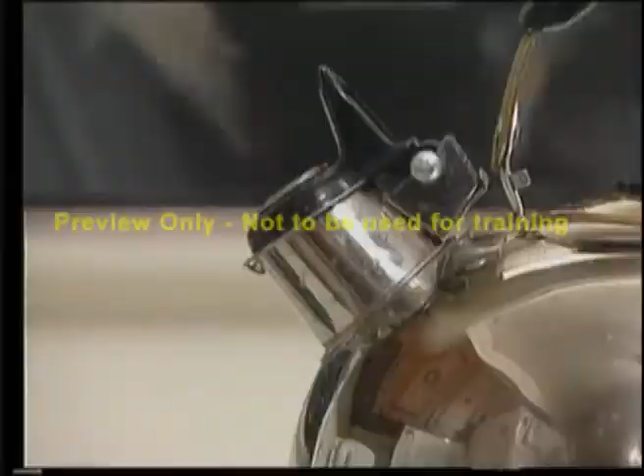We all have a lot of responsibility and people who depend on us. In order to be safe and to return home at the end of the day, important safety rules must be followed.

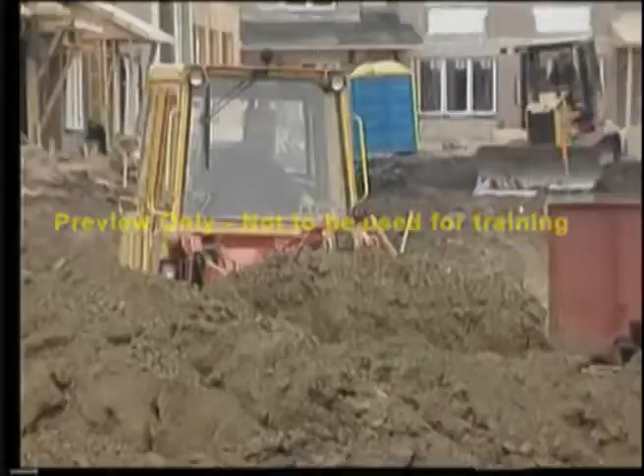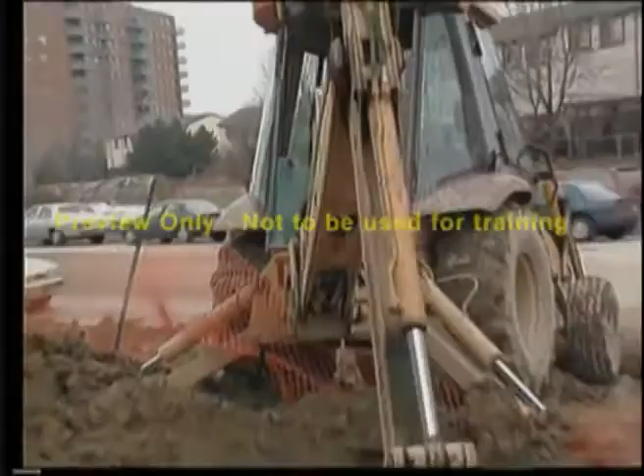Lift truck operators are just like millions of other professionals who earn their living by operating equipment or vehicles. It takes skill, training, and experience, realizing that no job on the ground or in the air can be done at the expense of safety.

Remember, you're working on a piece of machinery that weighs about 9,000 pounds. With a load, it increases up to 14,000 pounds. That's equivalent to 6 cars. Lift truck operators have a difficult job. They lift heavy loads and they maneuver in tight spaces.

Safety isn't something anyone sets out to ignore, but tight schedules, heavy equipment, pedestrian traffic, and congested workspace can compromise safety any hour, any minute, any time. Unfortunately, accidents can happen, but accidents happen more and cost more than we realize.

Between lost time, increased insurance premiums, and litigation, it's common for accidents to cost a company over $1 million. Some companies cannot survive the aftermath and close their doors permanently. Then there is personal injury. Let's not forget the family, especially the children. One accident can cost a child a lifetime of happy memories.

But we can improve safety with the right training and the right rules. Government studies have shown effective training programs improve lift truck operators' safety performance by as much as 70%. OSHA, the Occupational Safety and Health Administration, estimates that there are 68,000 accidents every year in the U.S. involving lift trucks. Of those, over 100 people are killed.

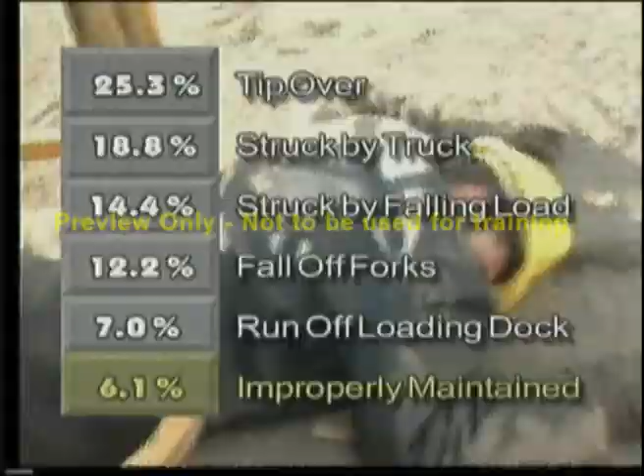With numbers like these and the cost of accidents, it's no wonder that OSHA requires that employers give proper training to all their lift truck operators. It also states that only trained and authorized personnel can operate a specific piece of equipment.

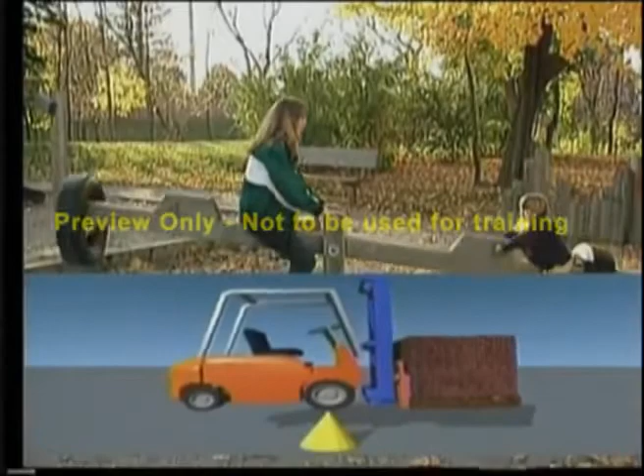Keeping your balance. You have to do it even when you're playing. This mother must think about load distribution and center of gravity just to keep this teeter-totter moving. A lift truck works much like a teeter-totter. The heavy counterweight on the back keeps the rear wheels on the ground.

As you can see from this diagram, the front wheels act as a fulcrum between the counterweight and the load, just like the pivot point of a teeter-totter. It's the same principle of leverage that allows a young child to lift her mother.

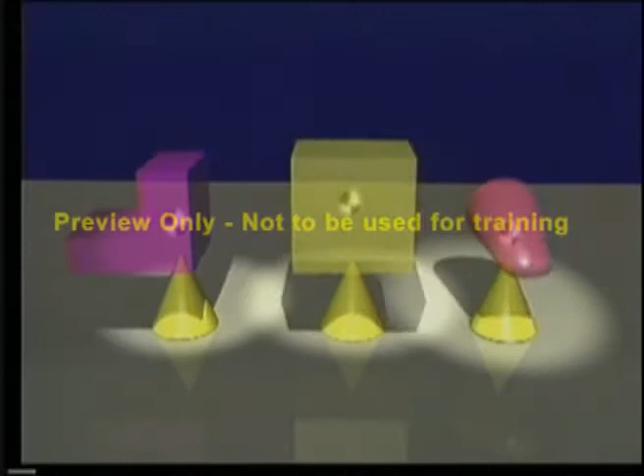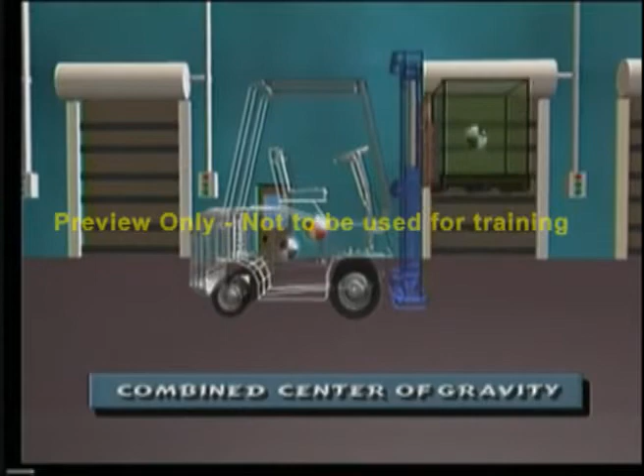Now, let's look at loads. Every object has a center of gravity. These three loads are all the same weight, but because of their different shape, they have a different center of gravity or balance point. When a lift truck picks up a load, the center of gravity of the truck and the center of gravity of the load will produce the combined center of gravity. The combined center of gravity will move in the same direction that the load moves.

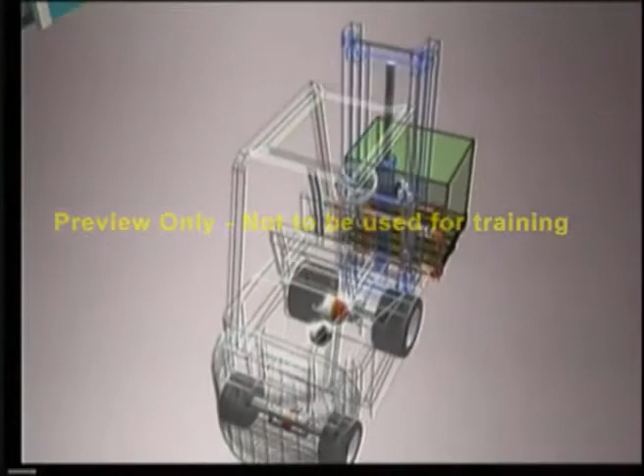A typical counterbalance lift truck has a three-point suspension system. The rear axle pivots at a single point in the center of the axle to compensate for uneven floors. This forms the stability triangle base. With the added dimensions of lift height, it forms a three-dimensional triangle similar to a pyramid.

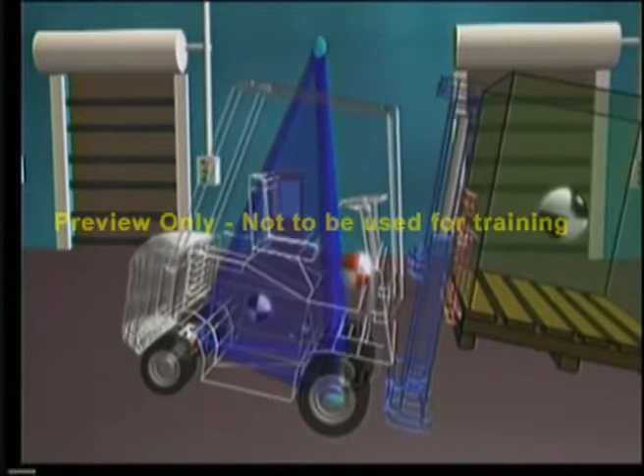When the combined center of gravity stays within the triangle, the truck is stable. Move the center of gravity forward of the triangle, as when a load is too heavy or too high, the truck will tip forward. This is called longitudinal stability.

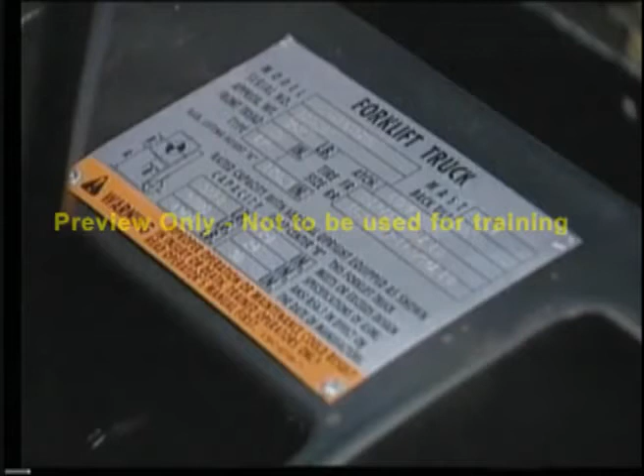Now, a truck must have a nameplate. This shows the maximum weight it is allowed to lift. This truck can lift 5,000 pounds, based on the load having a 24-inch load center. The load center is the distance from the face of the forks to the center of gravity of the load.

In this example, this 5,000-pound truck with a 24-inch load center will attempt to lift this 5,000-pound load. However, because of the unusual shape of the load, the center of gravity of the load is 30 inches from the face of the forks. Notice how the rear wheels lift off the ground when the capacity of the truck is exceeded.

Now, if the truck lifts the load from the opposite side, the center of gravity of the load is only 18 inches from the face of the forks.

This load can now be safely lifted. The nameplate will also show the maximum lifting height. The higher the lift, the lower the capacity.

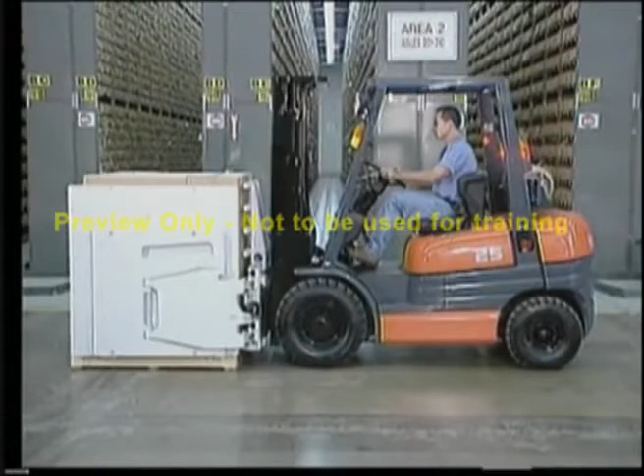Attachments such as this carton clamp actually reduce the capacity in two ways. First, the carton clamp moves the load away from the operator, reducing load capacity. Secondly, the weight of the clamp will further reduce load capacity. This 5,000-pound truck will now be rated or limited to lifting a load of 2,500 pounds or less.

If a new mast is installed that changes the maximum lifting height, or if an attachment is changed or installed, a new nameplate must be requested and installed.

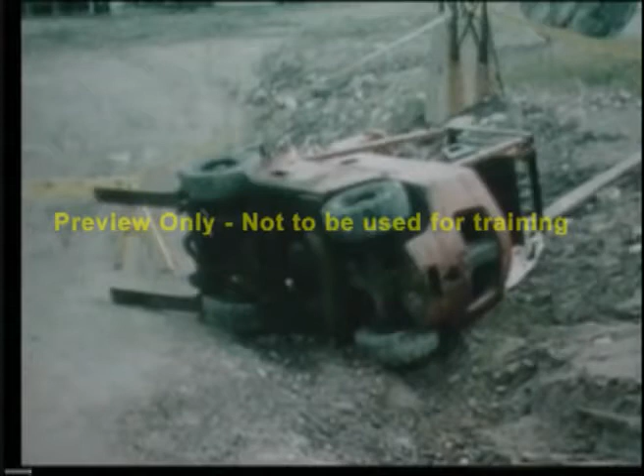Over 1/4 of all lift truck fatalities occur when a lift truck tips over. Understanding the principle of lateral stability will reduce the chance of your truck falling sideways. What do you think? Is a lift truck more stable with a load or without a load while turning? As this lift truck turns with a load, the combined center of gravity moves towards the edge of the triangle.

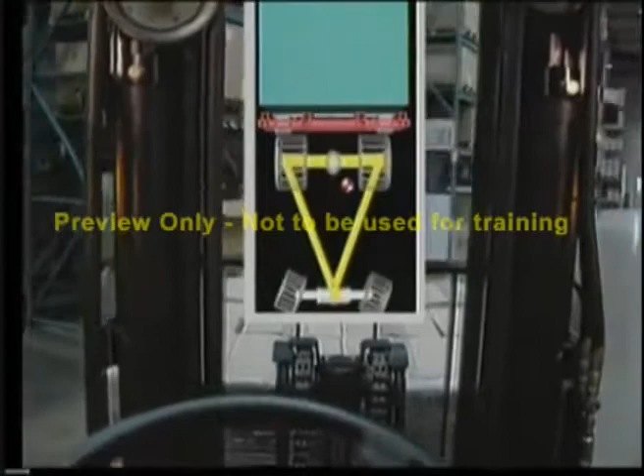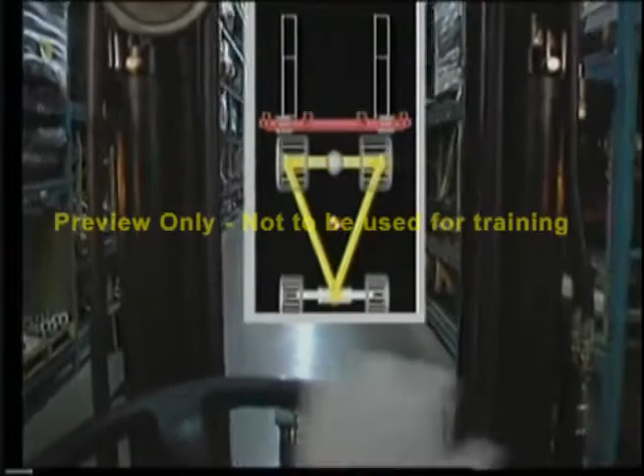Now, notice what happens when we complete a similar turn, this time without a load. Notice the center of gravity is much closer to the edge of the triangle. The closer it is, the less it takes for the truck to become unbalanced and tip over. This is why an unloaded truck should be operated just as carefully while cornering.

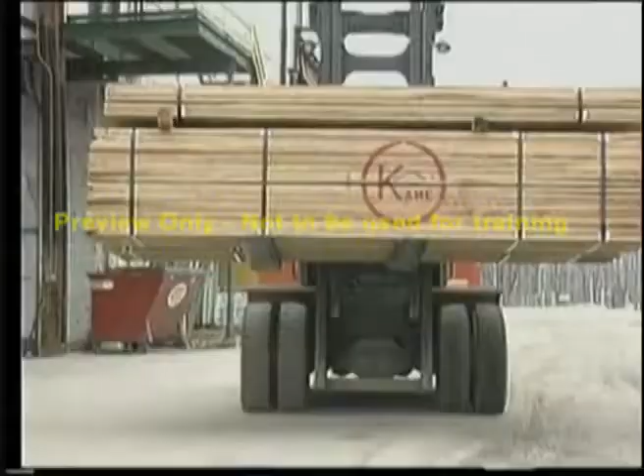Let's look at some causes of tip-overs. Sharp turns, raised masts, unstable loads, potholes, uneven surfaces, wet surfaces, and driving on ramps, to name a few. On October 17, 1994, Scott was operating a lift truck outside. He was attempting to pick up a load of empty pallets. While making a sharp turn, he hit a small pothole.

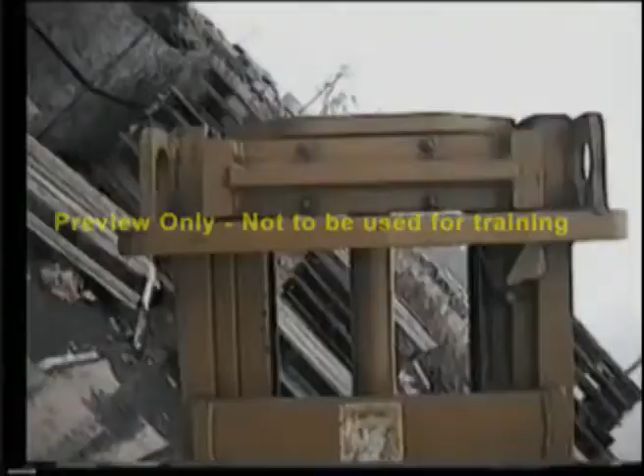Scott was fortunate. He had been properly trained. He knew how to best survive a tip-over situation. First of all, Scott was wearing a seatbelt. When the lift truck tipped, he stayed inside the operator compartment, his best chance for survival. He braced his feet and held on tight to the steering wheel with both hands while leaning in the opposite direction of the fall. Scott was able to escape with minor injuries.

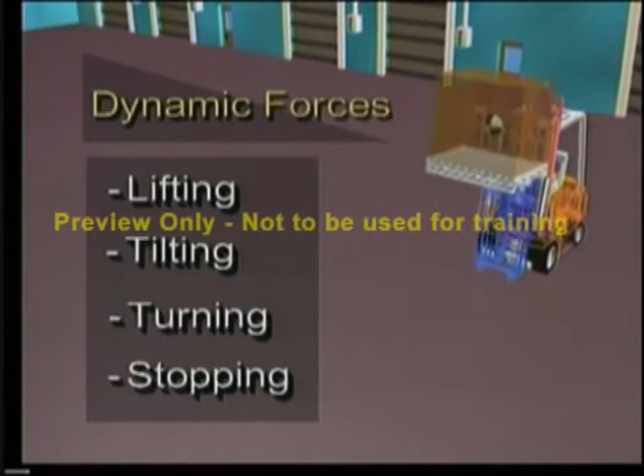Never attempt to jump out of your lift truck if you encounter a tip-over. Had Scott tried to jump clear of the truck, the overhead guard would have struck him, crushing him to death. When a lift truck is in motion, the dynamic forces such as lifting, tilting, turning, and stopping can cause the combined center of gravity to move outside the stability triangle, causing the lift truck to tip over.

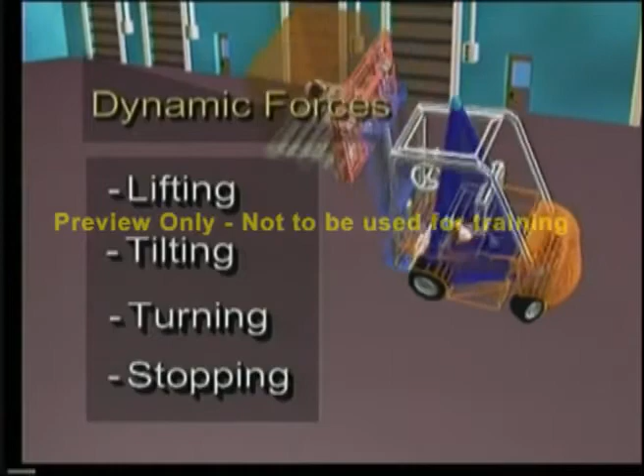When operating a Class 1 stand-up lift truck, operators must be aware of the causes that result in a tip-over situation. These are overloading, traveling with elevated loads, braking or accelerating sharply while turning, handling off-center loads, traveling at excessive speeds, falling from docks, dock plates, and trucks and trailers, to name a few.

With a counterbalance lift truck, the operator is instructed to stay with the truck when it tips over. Stand-up lift trucks are different. In the event your stand-up lift truck is involved in a tip-over or off-the-dock accident, you can be severely injured or killed. To minimize your risk of injury, it is recommended that you step off the rear of and away from your stand-up truck. Safety authorities such as OSHA state, when a stand-up rider tips over laterally, the operator must be trained to step off the vehicle toward the rear of the vehicle.

In this example, the truck is turning a corner too fast with the load raised. As the truck begins to tip, the operator senses this emergency situation and steps out of the operator compartment. In this next situation, the truck is approaching the loading dock too quickly and slides on a wet surface. Unable to stop, the truck continues over the edge. The operator senses this emergency situation and steps out of the operator compartment.

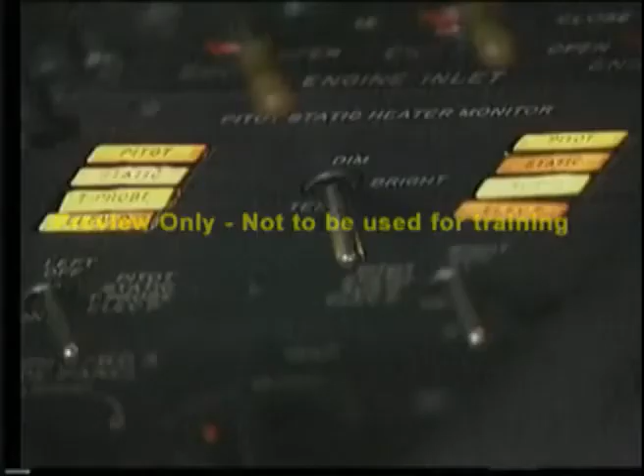When you put your life in the hands of professionals, you do not want them to cut corners. Pilots, for example, use a checklist to do a pre-flight inspection before every flight. 99 times out of 100, everything checks out okay. But it is the pre-flight inspection that contributes greatly to safe air travel.

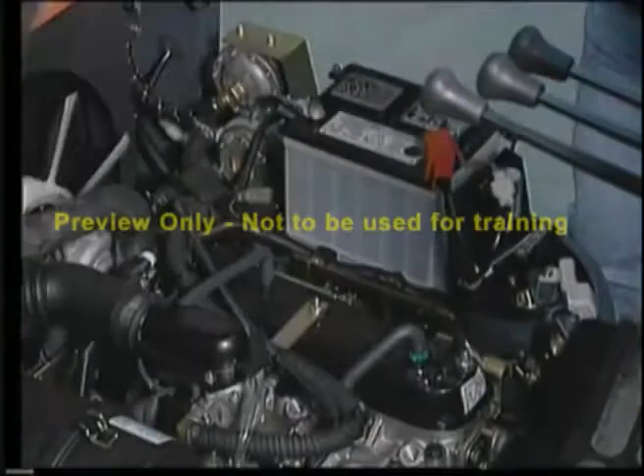It's the operator's responsibility to inspect the lift truck before the beginning of each shift and keep a written record. At times, this task may seem unimportant. However, 6.1% of accidents are caused by improper maintenance procedures. The objective of the inspection is to look for damage and to make sure the truck is in safe operating condition and meets the manufacturer's specifications.

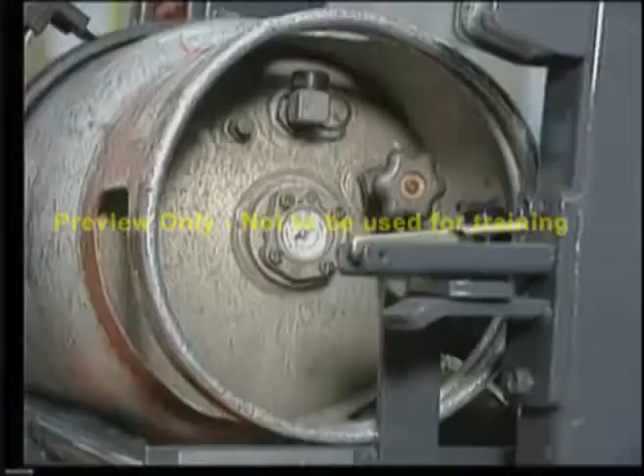A good place to begin an inspection is at the fuel source. In the case of an electric truck, start at the battery. With a propane truck, begin with the liquid propane cylinder. Make sure the locating pin is in place and the pressure relief valve is pointing upwards. Check the fuel level. Don't take a chance on running out where it is dangerous to refuel.

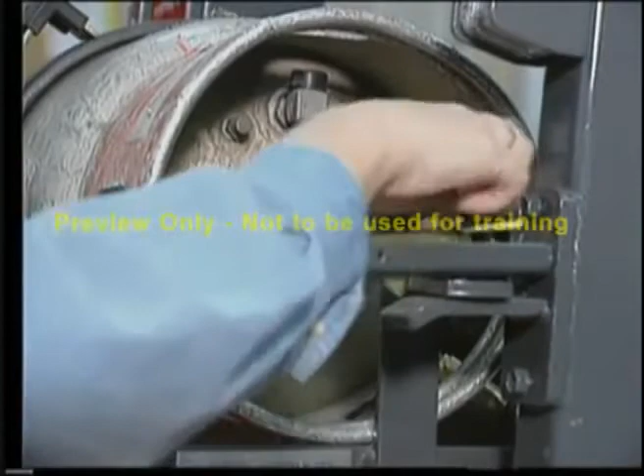Check the connectors and hoses. Then listen, smell, and look for leaks. Frosting will indicate even the smallest leak. Be careful. Touching this with your bare hands can cause a serious frost burn. Check the cylinder tie-down latches to make sure the propane cylinder is secure.

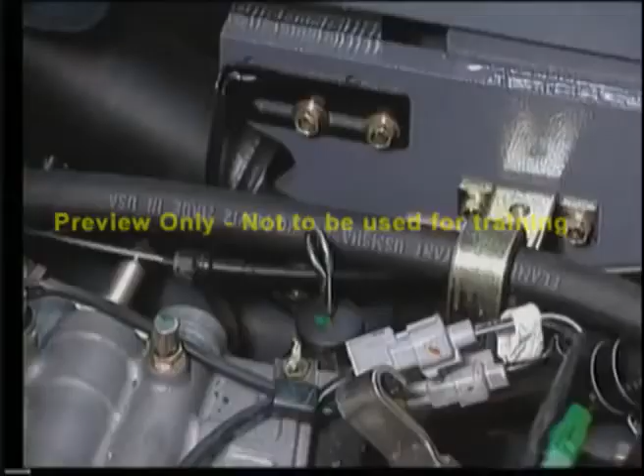Open up the engine cover and inspect the engine compartment and fluid levels. Check the battery, the engine oil, transmission fluid, the fan belts and hoses. It's important that they are not frayed or worn. Check the brake fluid reservoir,

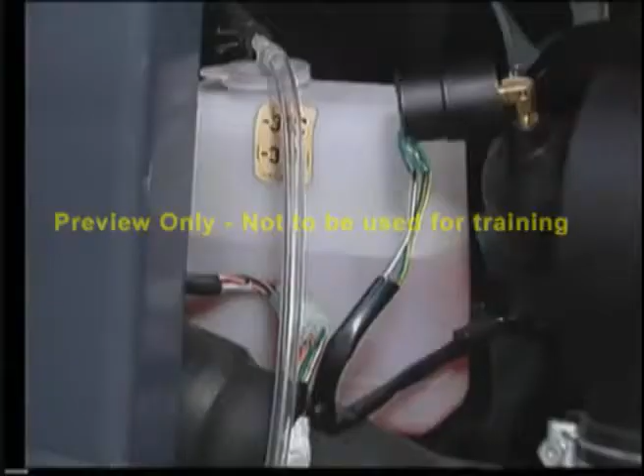hydraulic oil level, the radiator coolant, and finally, inspect the air filter. A dirty filter can increase harmful or poisonous exhaust gases. Close the engine cover and secure the propane cylinder.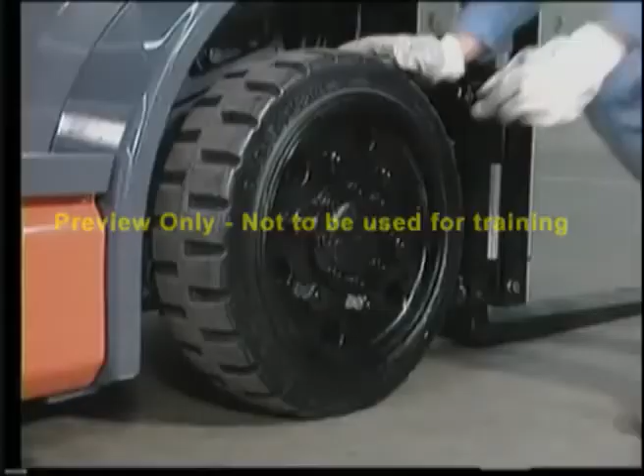Next, inspect the tires and wheels on the right side of the truck. Ensure the overhead guard is in good shape. Are the lug bolts present and tight to the touch? If not, call for repairs. Loose or missing lug bolts can cause damage to the truck or injure someone. Remember, do not operate the lift truck until repairs are made.

Are there chunks of tire missing? Cuts or objects embedded in the tires? How about wire, plastic strapping, string or foreign objects lodged in behind the wheel? These can cause costly damage or serious injury.

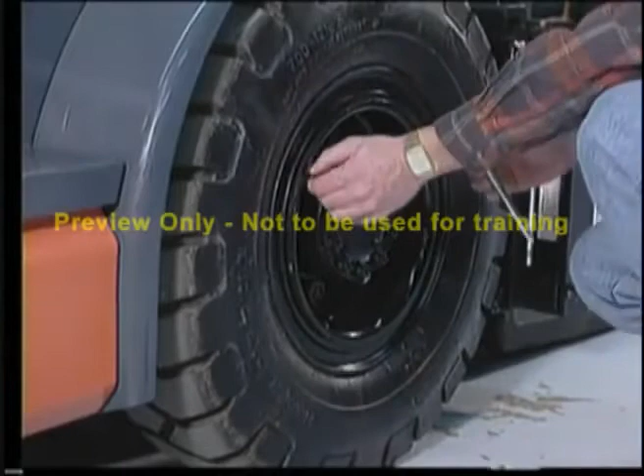If you're inspecting a truck with pneumatic tires, check the air pressure as outlined in the operator's manual. An underinflated tire will lean the truck to one side and will decrease stability. Notice that when the load is being lifted, it is actually moving away from the center of the truck. It wouldn't take too much to tip this truck over.

Examine the mast and forks. The forks must be level. Look for excessive wear or cracks in the hanger welding or in the heel. The forks must be evenly spaced and the fork pins locked into place. Equal tension in the lift chains is important. This will prevent uneven lifting. Verify that the chain is well lubricated.

Inspect the hydraulic tilt cylinders and lift cylinders. They must be free from leaking hydraulic fluid. Inspect the hoses around the mast. This is where leaks often start. Make sure the mast channel is free of foreign objects, such as pieces of wood or wire. Complete a thorough examination of the wheels and tires on the left side of the truck.

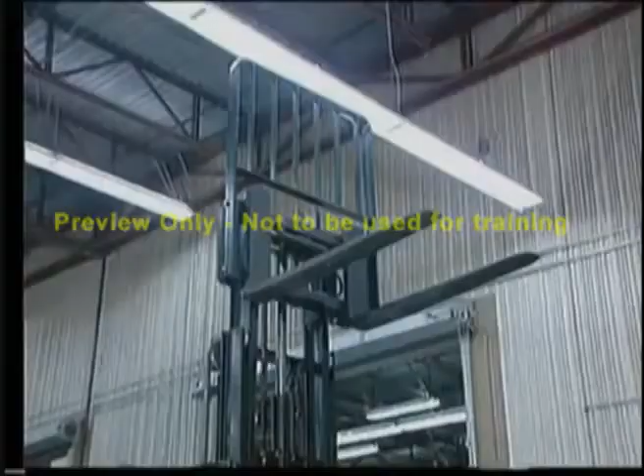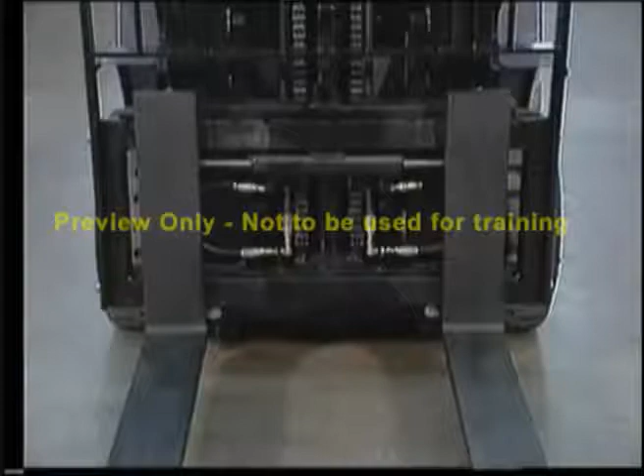To start the engine, make sure the parking brake is on. Listen for any unusual noises as the engine warms up. Pull the lift lever and fully raise and lower the forks to ensure free movement of the mast. Once the forks have been lowered, test the side shifter or any attachments if installed. Tilt the mast back and forth, making sure all hydraulic movements are smooth and operational.

Release the parking brake and drive forward or reverse about 20 feet in total, ensuring the steering and brakes are working properly. Check the brakes. The brake pedal must not reach the floorboard. If it does, the brakes are not functioning properly, and the truck should be taken out of operation until repaired. When finished, turn off the engine and apply the parking brake. Look under the truck to check for any oil leaks. Oil patches can cause serious injury to pedestrians.

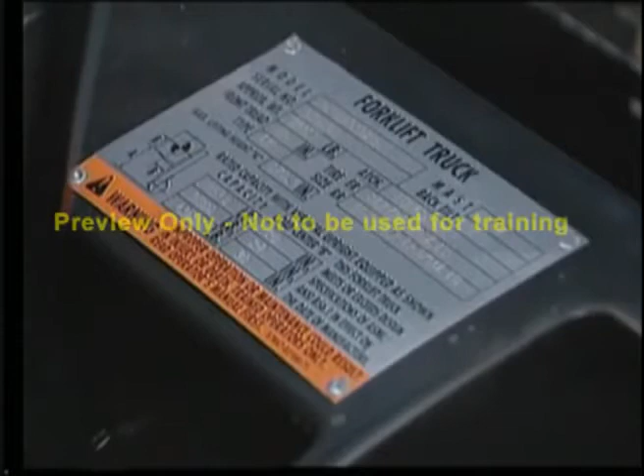Next, inspect the horn, lights, and gauges. Observe pedestrian warnings and any other electrical systems your truck might have. A lift truck cannot be put into service until it has a legible manufacturer's nameplate securely fastened. Make sure the seat belt is not frayed or torn and that it latches properly. All safety labels and instructions must be in place and readable.

The overhead guard and load backrest extension are important safety features. Make sure they are in place and secure. Finally, complete and file an operator checklist and report any defects to your supervisor in writing. If you're on the job and notice that your truck is unsafe to operate, park it and tag it out of operation. Report specific problems to your supervisor. Remember, failure to do this could cause injury to yourself and to the employees working around you.

Rules of the road. If you decide to ignore them, you endanger your life and the lives of others. There are federal laws that have established rules for lift trucks. OSHA requires that you be trained and authorized by your employer to use a specific lift truck.

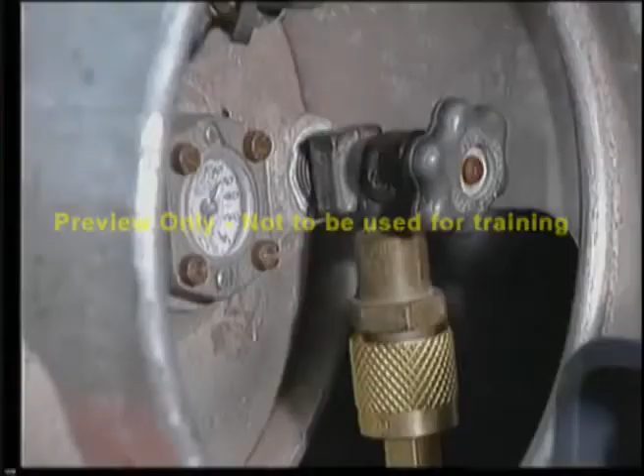Turn off the valve on the propane cylinder to prevent a fuel leak. Disconnect the battery connectors if using an electric power truck.

A common cause of trailer separation accidents is early departure. This is where a tractor-trailer driver assumes loading or unloading is complete and pulls away from the dock while the lift truck is entering or leaving the trailer. If the lift truck does not have enough time to stop, it can fall off the dock or trailer. Even if wheel chocks are still in place, they offer little protection if the tractor-trailer driver leaves before it is safe.

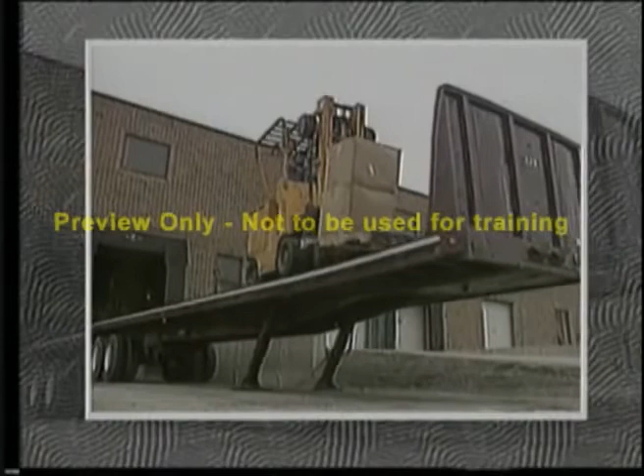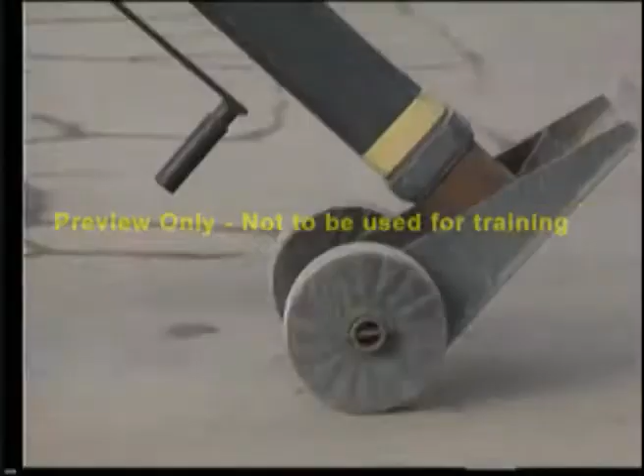Landing gear collapse is another safety hazard. When the tractor has been removed from the trailer, certain safety precautions must be taken. If the landing gear is weak or corroded, it may collapse due to the weight and forward motion of the forklift entering the trailer. Trailer upending is another hazard caused by the heavy loads being placed in the nose of the trailer that exceeds the counterbalance effect of the trailer's rear axle. Therefore, uncoupled trailers must be secured with a support jack before entering with a lift truck.

The most common form of trailer separation is trailer creep. As the lift truck travels on and off the trailer, its momentum inches the trailer away from the dock. To demonstrate this, the wheel chocks have been removed and the brakes released from this tractor trailer. As this moving lift truck stops, its weight forces the entire rig to move away from the dock. This is why the tractor trailer must be safely secured against the dock. Tractor trailer brakes must be engaged and wheel chocks must be properly installed.

However, wheel chocks have their limitations and could fail if placed on ice, gravel, or sand. For increased protection against these types of accidents, many companies have installed vehicle restraints that either hold the trailer firmly against the dock by engaging the trailer's ICC bar or by locking the trailer rear wheels with dual steel barriers. Lift truck operators are responsible to ensure the trailer is ready for safe loading or unloading.

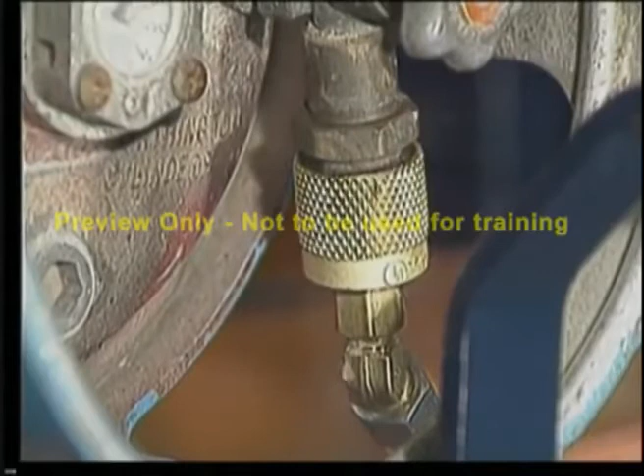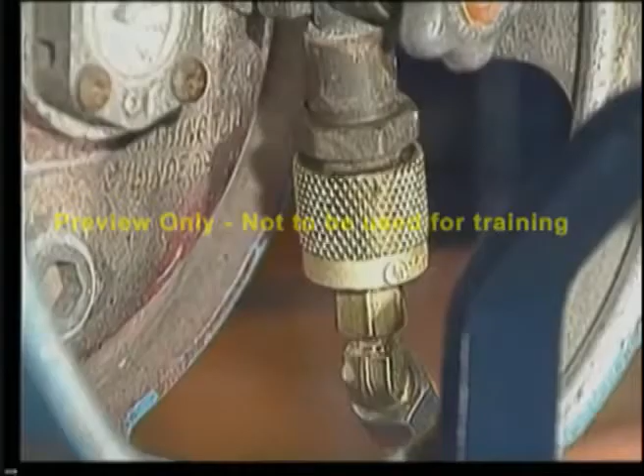If released, the expanding gas can cause a serious frost burn when it comes in contact with unprotected skin. For this reason, eye protection and heavy gloves should always be used when handling liquid propane gas. Liquid propane gas is heavier than air and will travel along the ground like water. Escaping liquid propane gas can be extremely dangerous if it is allowed to move to a low area where it can collect and ignite.

Here's how to minimize the chance of liquid propane gas leaking while changing the cylinder. These procedures must be followed. Start by parking the lift truck. Set the parking brake. Lower the forks. Place the transmission in neutral and leave the motor running. Put on your protective safety gear.

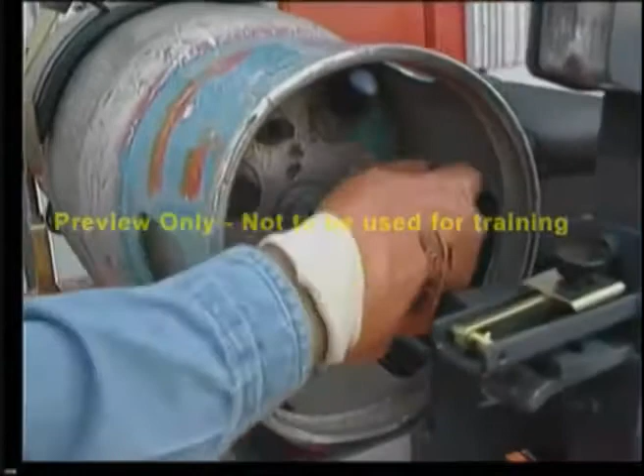Then, turn off the valve on the liquid propane gas cylinder and allow the truck to stall due to lack of fuel. This reduces the pressure of the gas in the fuel lines. Next, turn off the ignition and then try to restart the motor. If the truck will not start, you may proceed. First, uncouple the hose from the valve. Remove the cylinder and store it outside in a safe and approved method.

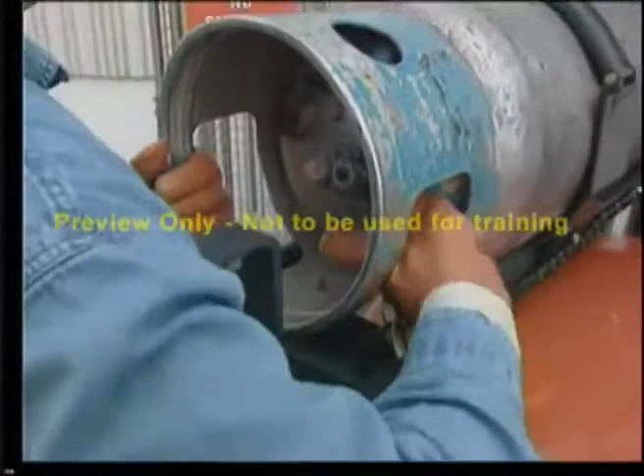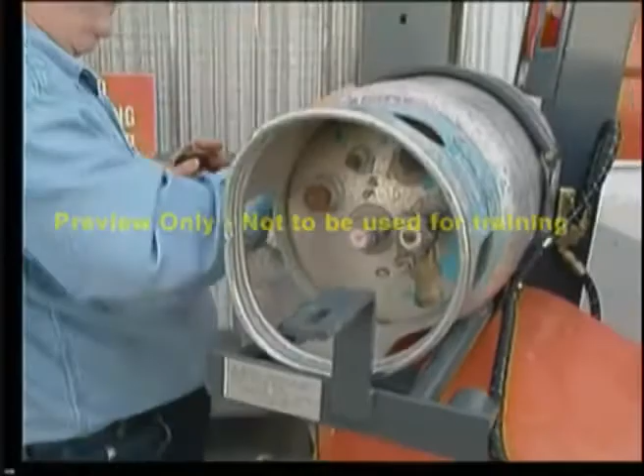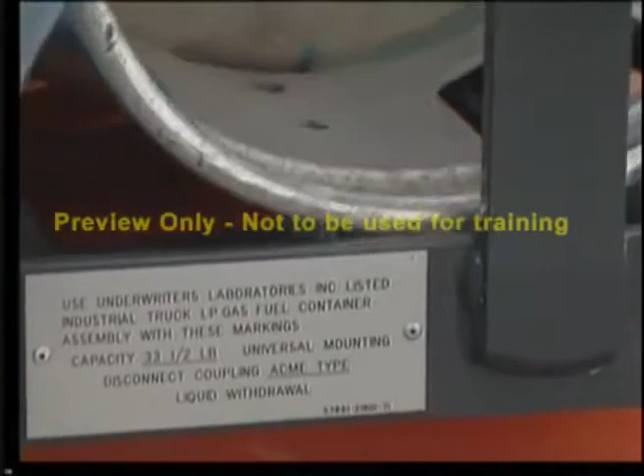When installing the full liquid propane gas cylinder, handle it with care. The liquid propane gas is under high pressure. Check the new cylinder for proper seals and gaskets. Don't risk leaks with a bad O-ring. Now, place the cylinder on the locating pin and set it in the liquid propane gas tank bracket. Remember, the pressure relief valve always points upwards.

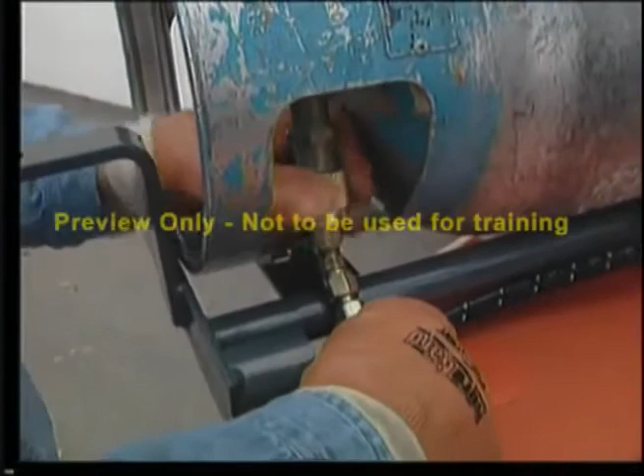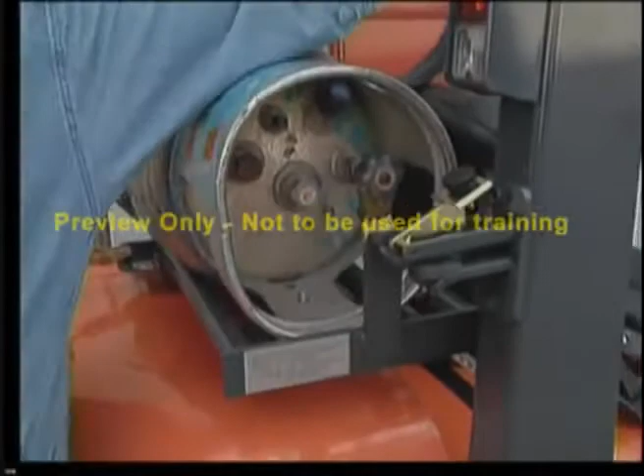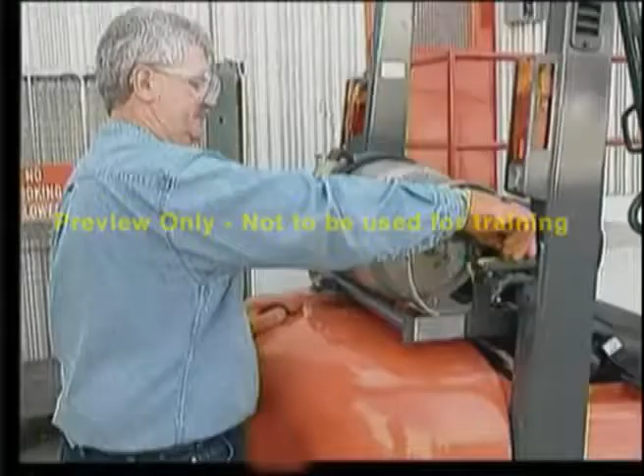Secure the cylinder with the bracket restraints. Open the valve slowly. Look, listen, and smell for leaks. Frost on a fitting is a sure sign of a dangerous leak. Ensure that the cylinder is secure. Now you're ready to go.

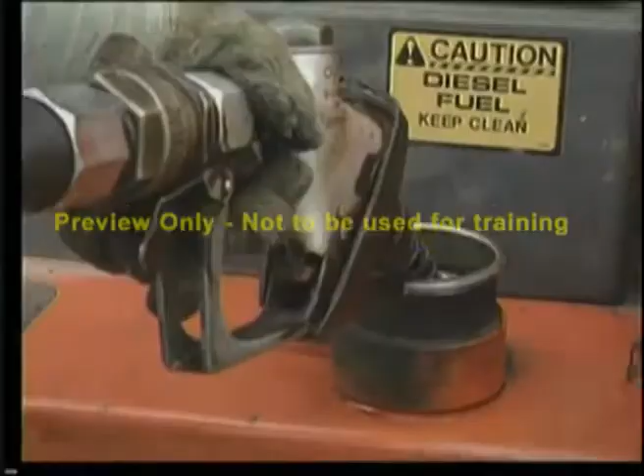For diesel or gasoline refueling, drive the lift truck close to the pump and turn off the truck. Open the gas cap and feed the nozzle into the tank opening. Turn on the pump and proceed to fill the tank. Do not fill the tank completely. This will minimize the chance of fuel spilling out while driving.

When finished, replace the cap and clean up any overspill with a cloth. Finally, start your truck and proceed with your work in a safe manner.

In many ways, industrial batteries are like young infants. They need to be changed and cleaned regularly. If they become too tired, they start to act up. They constantly need to be replenished with water. But given too much, they'll spit up all over. If you take care of your battery, it will last for many years. Ignore it, and you will have problems.

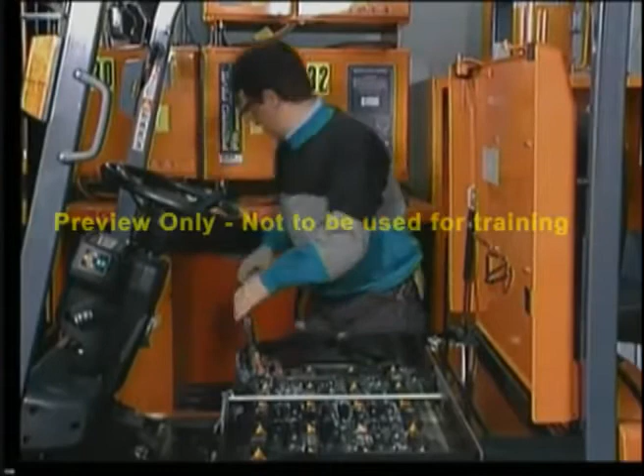Unplug the battery connector from the truck and attach the charger connector to the battery, never to the truck. Check the cables for wear and the connectors for damage. Turn on the charger following the manufacturer's instructions. When the charging process is complete, always turn the charger off before unplugging the connectors.

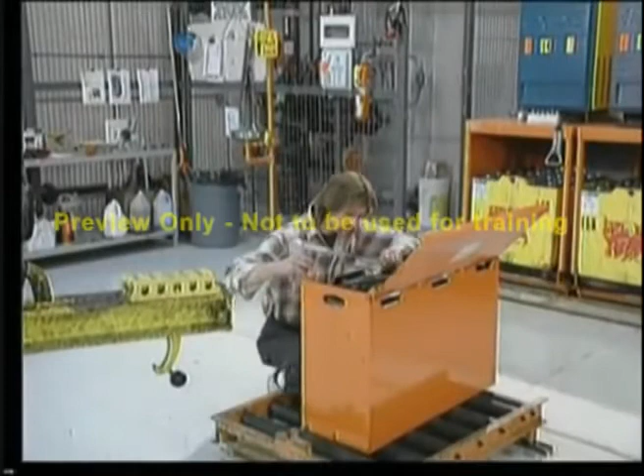In March of 1995, a newly trained operator was testing the electrolyte with a hydrometer. He was not wearing any face protection.

He squeezed the hydrometer too hard. This caused the electrolyte to spray up on his face. He immediately went to an eye wash station. Luckily, he was trained on what to do if he came in contact with acid and suffered no injuries.

You should always wear protective equipment when you're anywhere near battery acid. Gloves, goggles, and a body shield are mandatory. Have an eye wash station nearby. If acid gets into your eyes, go immediately to the eye wash station and run water over the affected area.

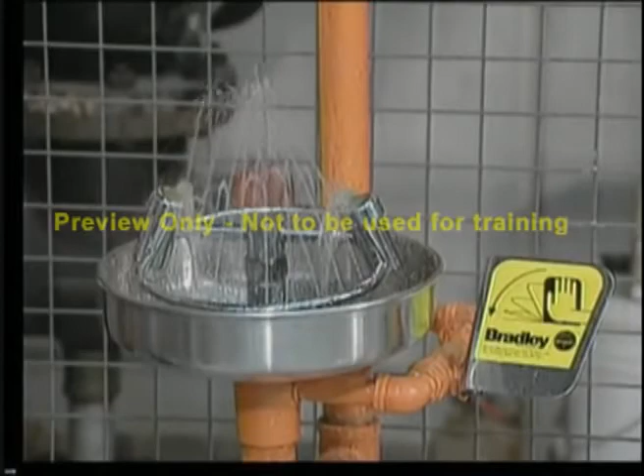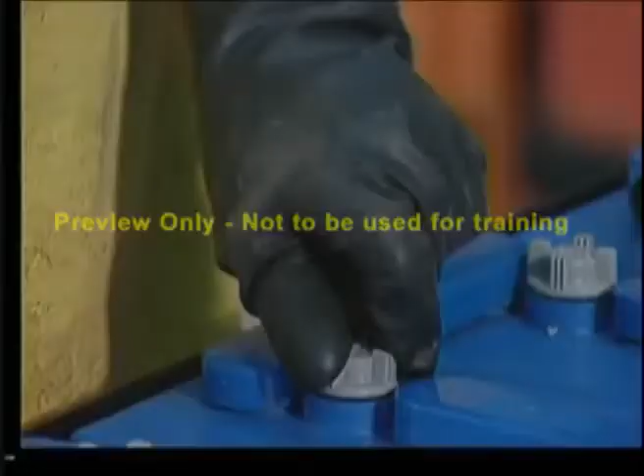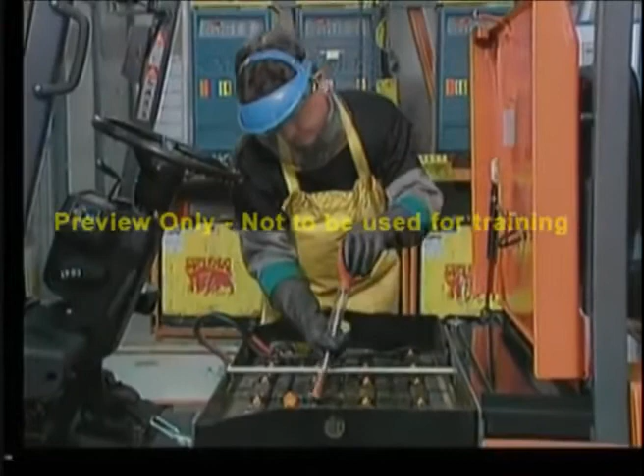Then, get medical attention. After charging, remove the caps of 3 or 4 cells to determine the electrolyte level. Only a flashlight can be used to look into the cells. When the battery is fully charged, the electrolyte has a high acid content. This can be tested with a hydrometer. By testing a small sample of electrolyte, you can determine how much energy is in a cell. This will also locate bad cells in a battery.

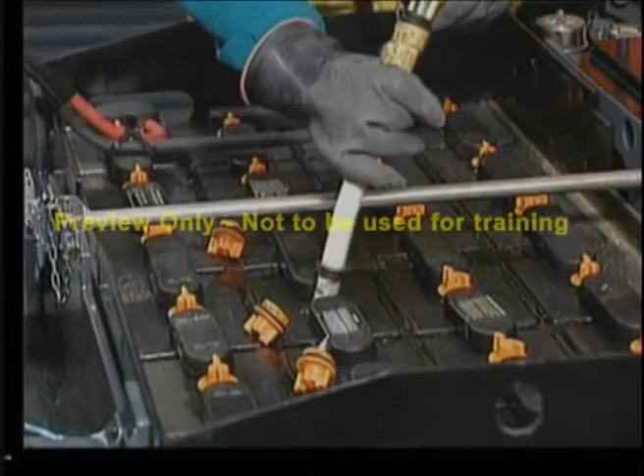To avoid acid spills, only add water after charging. Adding too much water before charging will cause overflow during charging and create a hazardous spill. If electrolyte does escape, it must be neutralized with baking soda and water.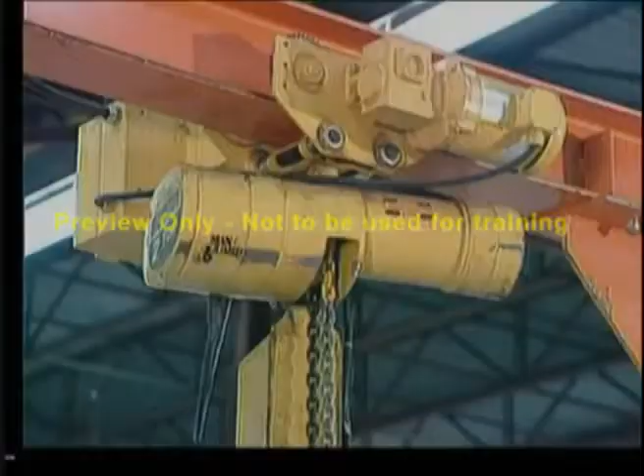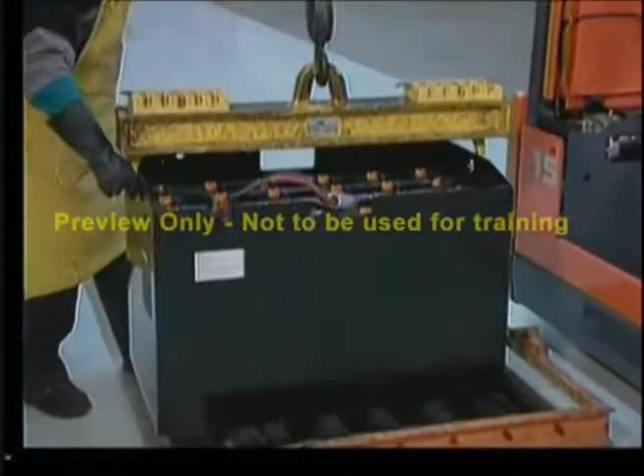Many people use a crane to remove the battery from a lift truck for maintenance. Carefully attach an approved insulated lifting beam to the battery and lift it out. Place it near the charger, then pick up the freshly charged battery. Be careful, the battery weighs thousands of pounds and can crush your hands or feet. Use only equipment designed for this purpose.

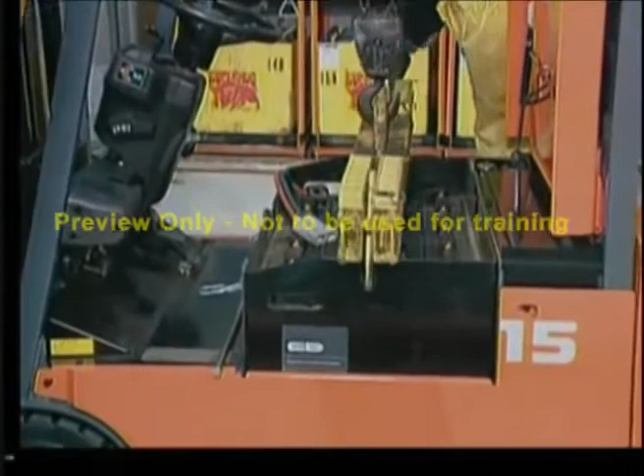Electric trucks depend on the battery to balance their loads. Use a battery that is the proper weight and voltage. Check the lift truck's nameplate and compare it with the battery's weight and voltage as marked on the battery casing. Join the connectors and close the cover.

Some trucks use battery slides. Remove the safety gate and roll the battery out of the truck. In order to align the fresh battery to the battery compartment, connect extension cables. Then, drive the truck into position. Remove the extension cables and roll the fresh battery into the truck. Replace the safety gate, and then connect the battery cables.

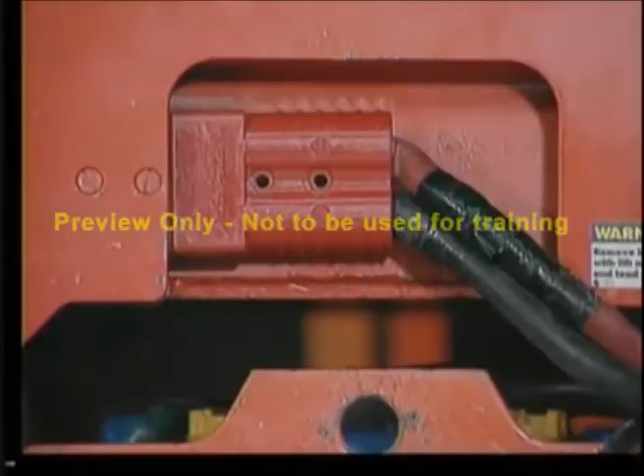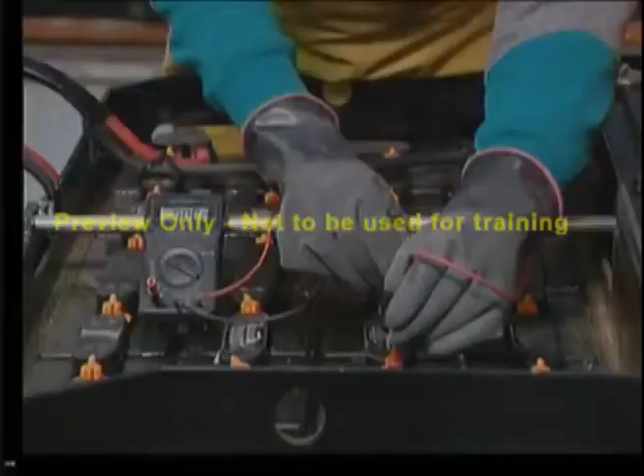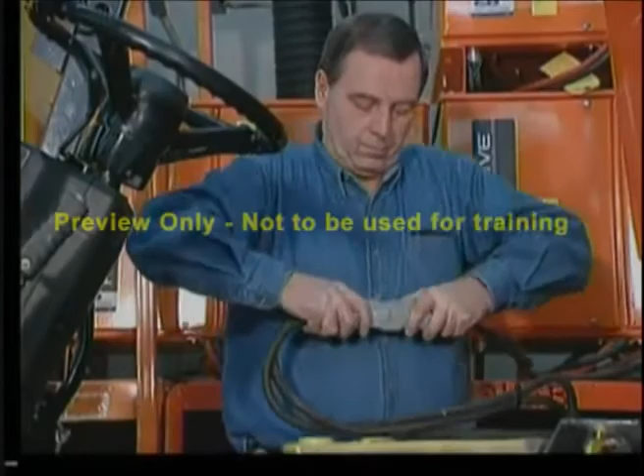Here are 10 tips on how to get the most out of your battery. Follow the manufacturer's instructions. The life of a battery and your lift truck controls can be severely shortened by not following the manufacturer's instructions on charging and maintaining the battery. Inspect the connectors. A loose, cracked, or pitted connection can cause arcing or sparking. Don't use the connector as a switch. Always shut off the charger when connecting or disconnecting the battery.

Add water after charging. Charging increases the electrolyte levels in cells and can cause overflowing. Overflowing means a loss of electrolyte and damages your truck. Keep it clean. Batteries and their compartments should be kept clean and dry. If electrolyte is spilled on top of the battery, neutralize it immediately with a solution of baking soda and water. Always wear a face mask or goggles, rubber gloves, and a rubber apron when cleaning batteries. Don't lay tools on top of the battery.

Battery gases are explosive. Keep vent caps in place. Vent caps allow gas to escape and keep foreign objects from falling into the cell. Remove vent caps only to add water or to take hydrometer readings. Keep your battery cool. A normal charge can increase the temperature of a battery by 15 degrees or more. Operating hot batteries shortens their overall life. Allow the battery to cool down at least the same length of time that it was charged.

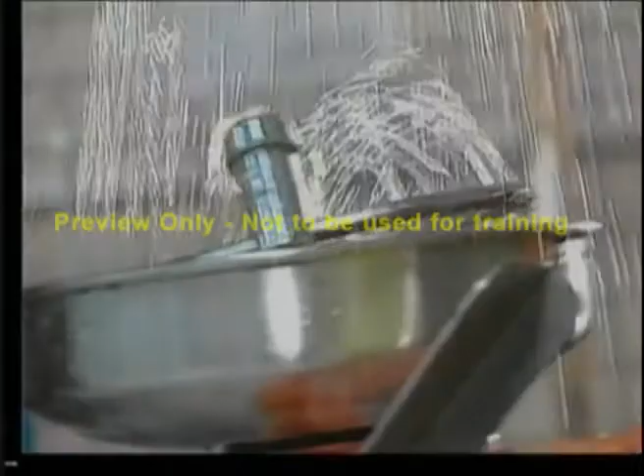Don't overcharge. No amount of overcharging can increase battery capacity, and it substantially shortens battery life. No smoking, sparks, or open flames in the area. Charge in a well-ventilated room. If electrolyte gets in contact with your skin or eyes, rinse thoroughly with water for at least 10 minutes and get immediate medical attention.

Safe operation of a lift truck is knowing your equipment and following the rules of the road daily. Take pride in knowing that your performance affects you and your fellow workers. Your biggest job is ending your workday safely and returning to your family and friends. It's hard to play the game when you're injured. So learn to do your best so we can all get home.